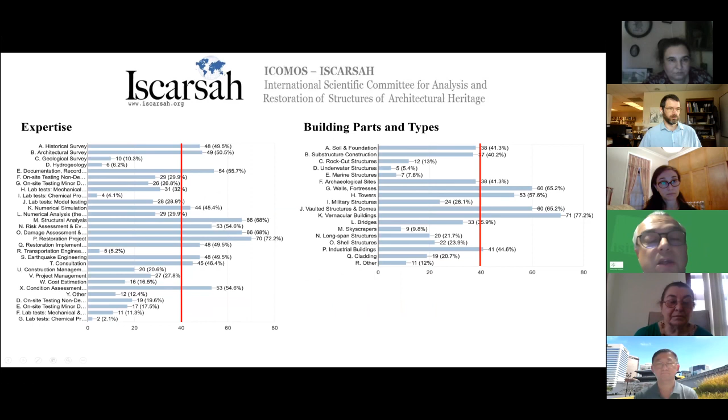This can be sent to you by Tom, the presentation, or I think Tim already sent it to all. Regarding the actions that act on cultural heritage buildings, earthquake is a key concern, the most destructive disaster in terms of loss of buildings and killings, and you can see the expertise is quite high. Also in long-term decay and in foundations and soils, which is a bit unexpected since the qualification in soil and foundation is lower. But this may have to do with the fact that most of our buildings have damage due to foundations.

So I don't know if there is any particular question.

Yes, I'd like to make one small comment about the map I sent, which I made late last night, which essentially shows our representation by geography. Again, I want to say this is preliminary because only 97 people filled out the database. I put the database form again in the chat if people want to fill it out. You do see where we lack geographic representation quite clearly. I think that's an interesting thing to remark. After everyone has filled out the database, maybe we'll have a better idea about our representation.

Right now, if you look at Africa, China, the Philippines, and the area around South America, we are very poorly represented by people who filled out the database thus far, I need to say. That's all.

Okay, so that's all on my side. And I give it back to Goran.

All right, thank you. I can show the map that he's referring to briefly if you would like. Here's the map with our distribution of memberships, which was actually different than I expected. That's not the distribution of membership, is it? That's the distribution of people who've responded to the expert survey. Yes, thank you for the correction.

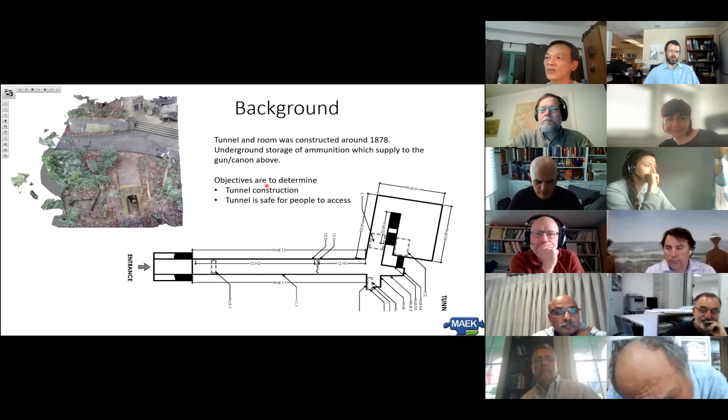The objective was really to determine the construction of the tunnel as well as assess its safety. Unfortunately, there was no drawing at the time because it was so long ago. We started off by, aside from radar, flying an indoor drone to capture the internal condition. We also employed pulse echo tomography to determine the condition of the structure.

There are different types of radar, ranging from a simple, small handheld model to a larger vehicle-operated one, and sometimes we do scans on the underside of the ceiling.

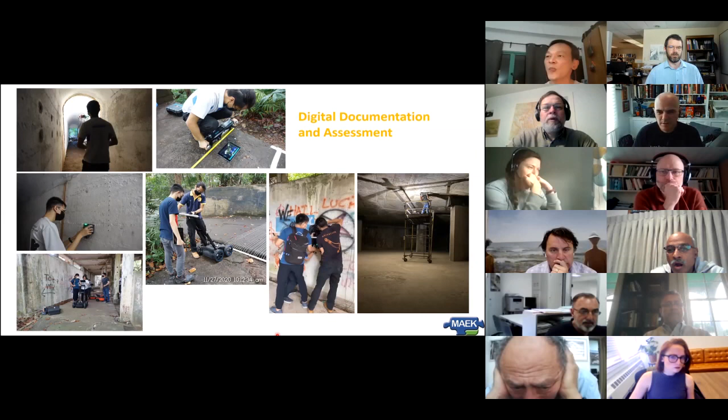We used a combination of radar and LiDAR to scan above the tunnel at the top, and then generated a 3D model. After generating the 3D model, we could find the overburden soil, the depth of soil above the tunnel. So an overall 3D model was generated using the indoor drone as well as the LiDAR.

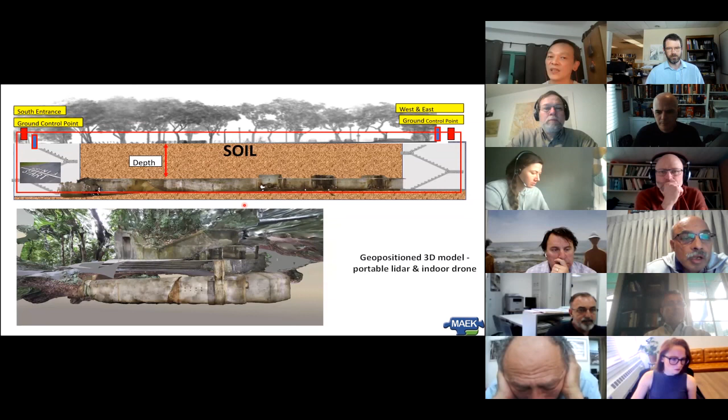Then, using a combination of different radar, we could pick up, for instance, the back wall of the tunnel. Because the tunnel was surrounded by soil, we wanted to know the thickness of the wall. So through the scanning, we could find the thickness of the wall at different locations of the tunnel.

When we ran the radar at the top of the tunnel, we could pick up the arch - this is the arch of the tunnel entrance - and we could find the wall of the tunnel. This was helpful in determining the overall construction of the tunnel itself.

From there, we developed the overall scheme showing different sections of the tunnel with different thicknesses and dimensions. In fact, from here you can see that the concrete tunnel has no reinforcement - it's just mass concrete, about 600 mm thick.

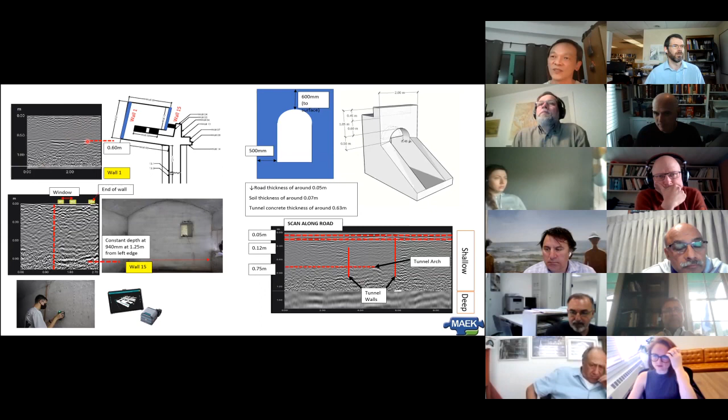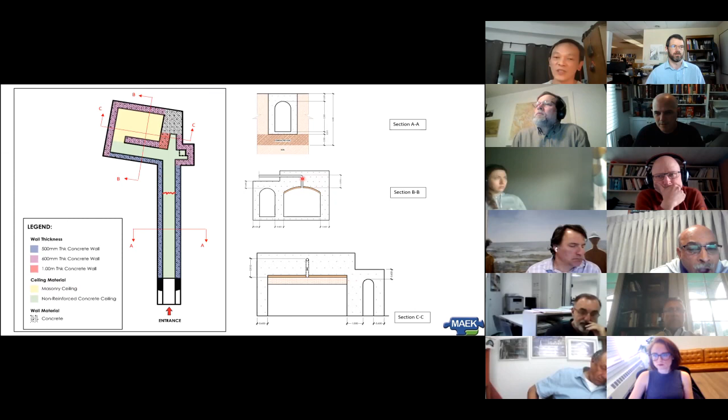There was various thickness in the tunnel. So from here, we have marked out the different dimensions and construction, ranging from 500 mm to 1 meter thick tunnel sections. And on part of the ceiling, we found it to be constructed of masonry - so it's a masonry arch above which you have the concrete ceiling.

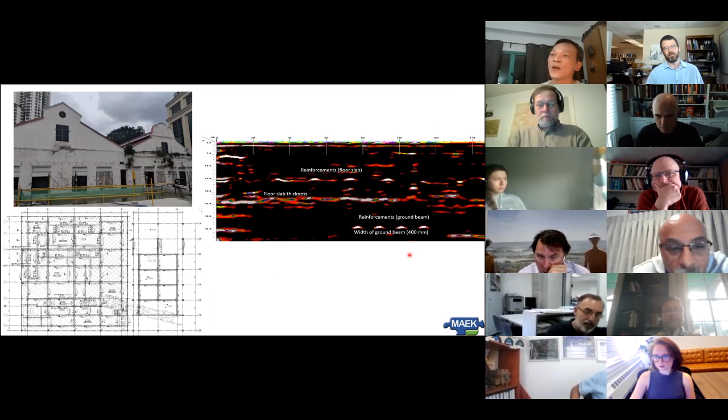In this particular case, this is a warehouse built in the early 1900s. In the recent restoration, the engineers wanted to know the construction of the slab. There was no drawing whatsoever, no indication of where the ground beams are located. Some old drawings were available, but no dimensions were shown. So through the radar, I could find the reinforcement of the slab, the thickness of the slab, and even the reinforcement and dimensions of the ground beam below the slab.

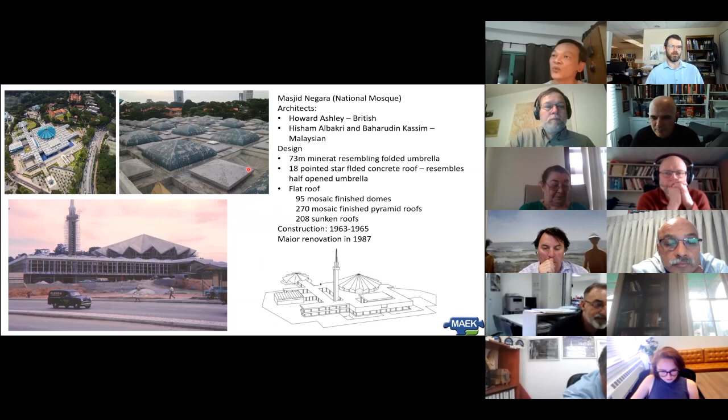And over here, this is a mosque, the National Mosque in Malaysia, built in the 1960s, restored 3 years ago. You can see the roof has a dome roof, pyramid roof, and a sunken roof. The sunken roof is where rainwater discharges from the roof to the ground below. But there was no drawing to show where the rainwater downpipe had been located. When we scanned some of the columns, we detected the rainwater downpipe. A horizontal scan found a parabola. A vertical scan found a line of the rainwater downpipe.

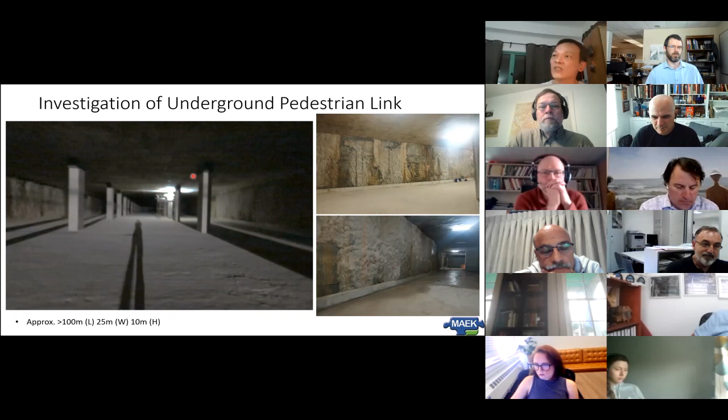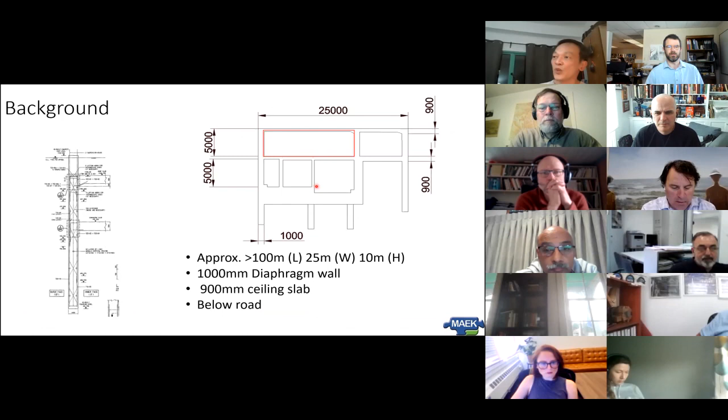A recent project we had is the underground pedestrian link, which has been abandoned for a couple of years. The new owner went in and wanted to redevelop it to make use of the tunnel as a commercial space. In the tunnel there's a lot of water seepage, so the intent is to establish where the water is seeping in. This is the section of the tunnel we were tasked to investigate, below which is the MRT line - it is an MRT station.

Aside from radar, we did the pulse echo tomography. We can do a line scan, picking up the parabola of the steel reinforcement, either in parabola form or after migration of the data, you get dots - these are the positions of the reinforcement. What's interesting is that when we did an areal scan, we could see the reinforcement bars on the right side very sharp and clear, but on the left the image of the reinforcement bars was very blurry. Depending on the software used, you can move the image from top to bottom.

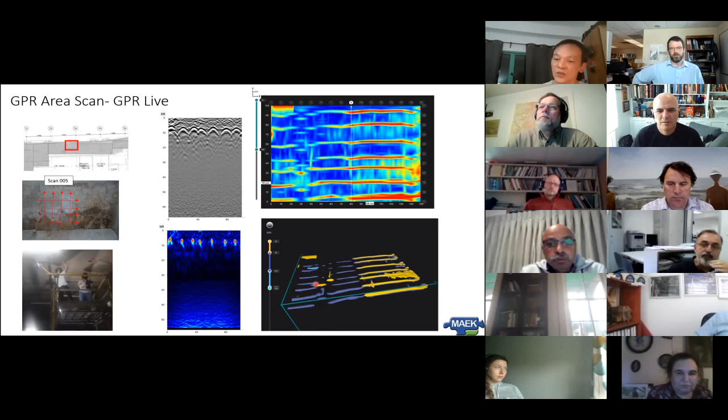On the right side you can see the reinforcement bars very nicely, but when you move towards the left, the bars seem to be much deeper. Why? Because in the presence of moisture, the speed of the electromagnetic wave slows down. Once it slows down, the bars appear to be much deeper from the surface. So we can do it as an areal scan in 2D mode, or use a GPR slice software to generate a 3D mode, determining any subsurface anomalies below the surface.

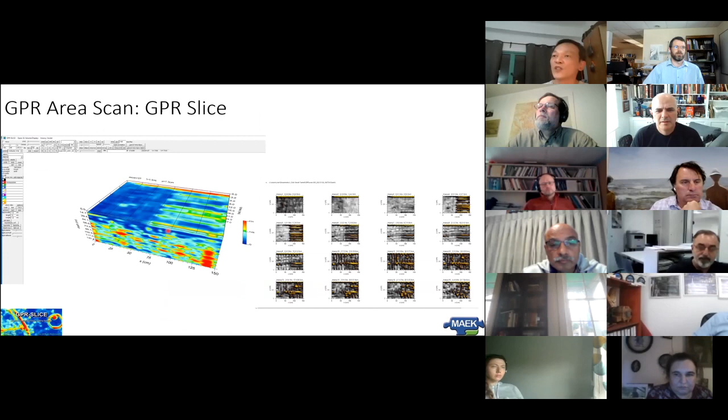Lastly, this is the Church of Nativity in Singapore, built in the late 1800s. You can see over here the columns have been subjected to some rising damp and moisture. We have done a lot of testing around the building's columns to pick up the moisture content below the column, at mid-height, and above.

But we couldn't find the salt content, which required drilling of powder and carrying out chemical analysis. So what we did, interestingly, was to run a radar from the bottom to the top. At a certain height, which appeared to coincide with the area where the salt has caused damage to the plaster, there is an attenuation of signal, meaning the electromagnetic signals have been fully absorbed by the salt. You can see from here, it's about 1.2 to 1.4 meter height.

So we know in this case, aside from rising damp in this old masonry building, we know where the salt tends to accumulate more, at a certain height. And this can be easily picked up from the radar. We found that at the end of the day, radar is very useful in a lot of diagnosis, and we would hopefully like to use more and perhaps share with members of the community the wonderful technique this can bring.

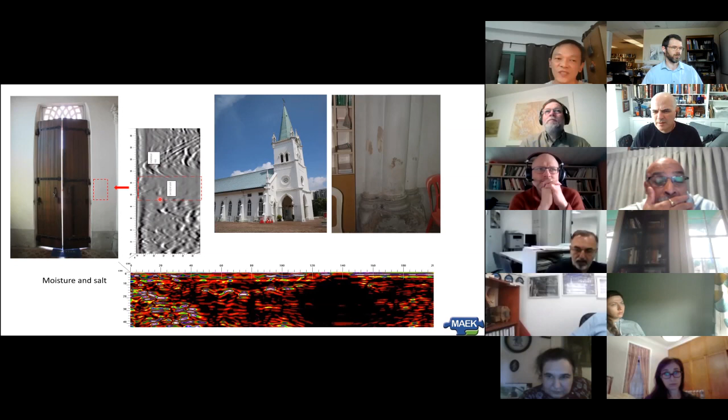And with the improved technology nowadays we have, which allows us to send the signal much further down into the substrate and collect a lot more data, and through some software, you can process it. Okay, with that, I thank you very much.

Thank you. Thank you. It was very interesting.

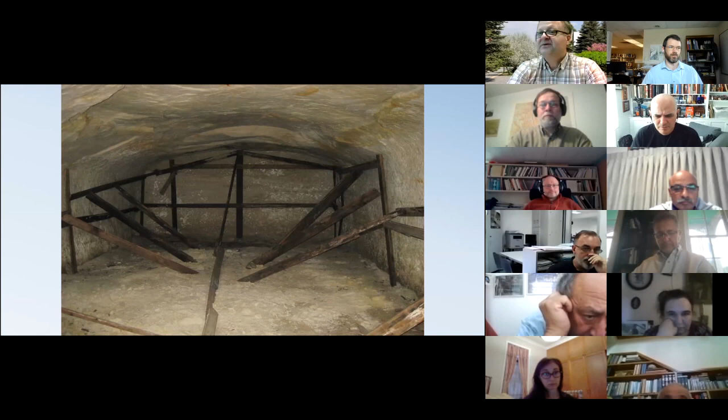but it is surprising to see that glass is a very high strength material. I just would like to highlight that it is about 400 to 800 megapascal strength. So when you compare this with concrete of only 30 megapascal or steel with 320 megapascal, it's like a super material. And the tensile strength is also in the range of, for regular glass, I would say 40 megapascal, and for tempered glass, 120 megapascal.

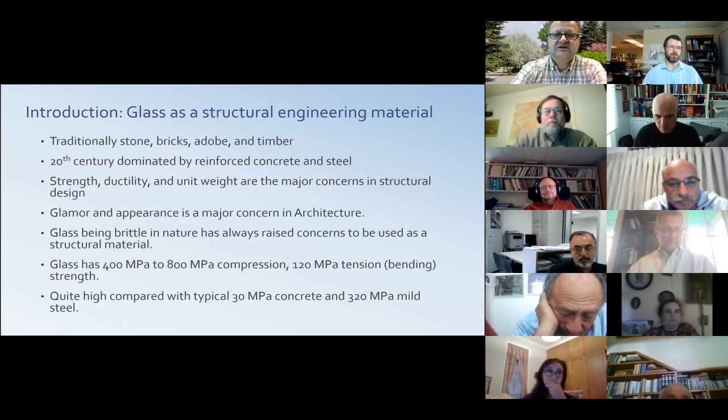So why don't we use it for structural purposes, especially for temporary strengthening or supporting historic structures? Probably because we don't trust it, because, well, it basically cracks and breaks.

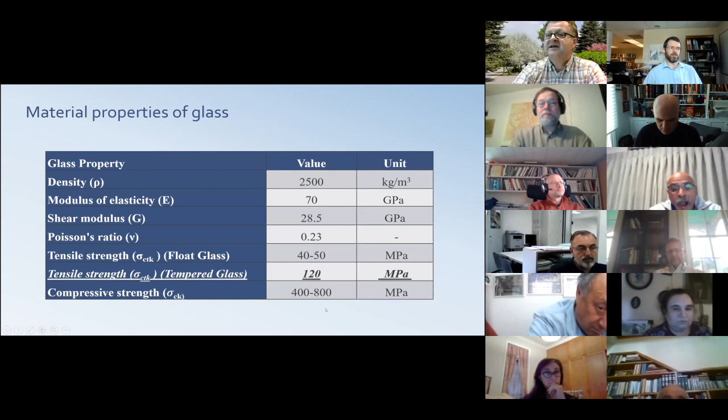So 40 to 50 megapascal of tensile strength for float glass, and about 120 megapascal for tension of the tempered glass, and all the way to almost 1 gigapascal, a very superior strength. With this new glass, there are ways we can prevent cracking. One of them is post-tensioning, and this is what we have investigated in this study.

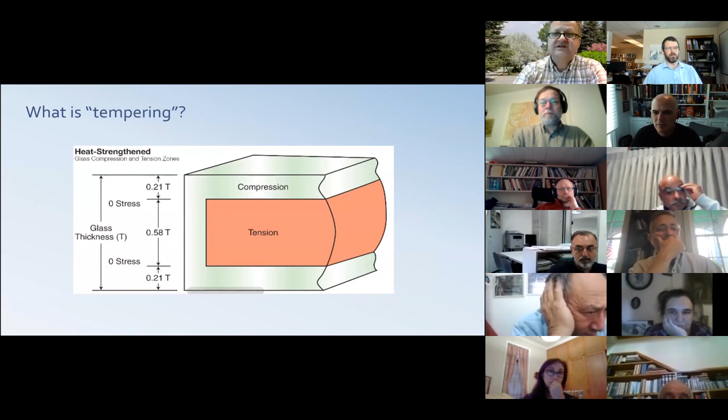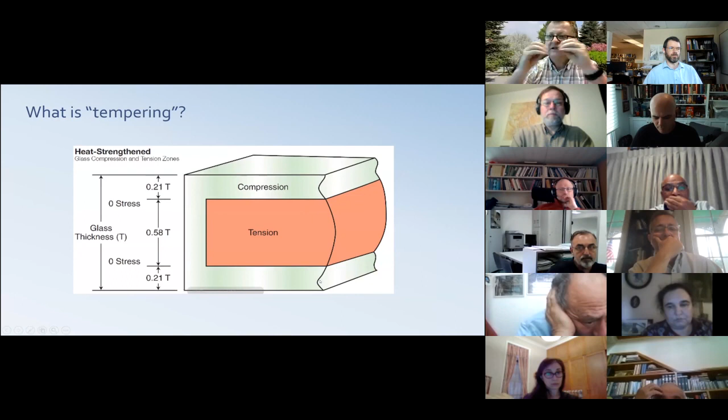Tempering is a strange act on glass that nowadays, for example, car windows are like that. They are higher strength. Actually, it is the ordinary glass, but it just went through some process. So when this is done, the outer layer is under compression and the inner layer is in tension.

So because of that, when it breaks, it just tears up into little pieces, and people use some transparent material on both sides so that when it cracks, it just doesn't shed into pieces.

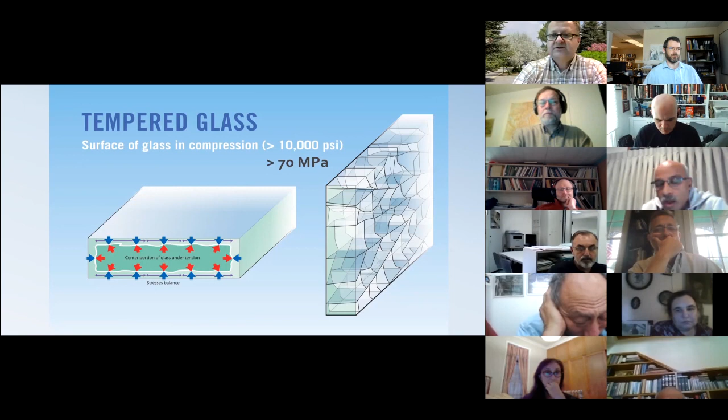So how it is done is you put the glass through some heating chamber, and when it comes out, you immediately cool it off. So the exterior parts are very quickly hardened, and the inner part is still soft. And over time, as the inner part gets stiff, it shrinks and applies a post-tensioning to the outer edge. So this is the production sequence.

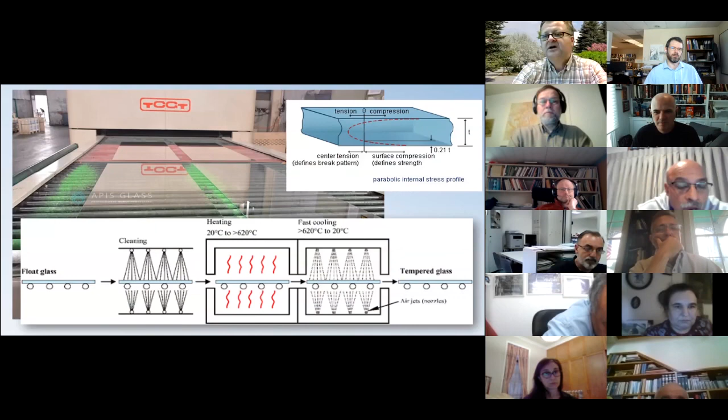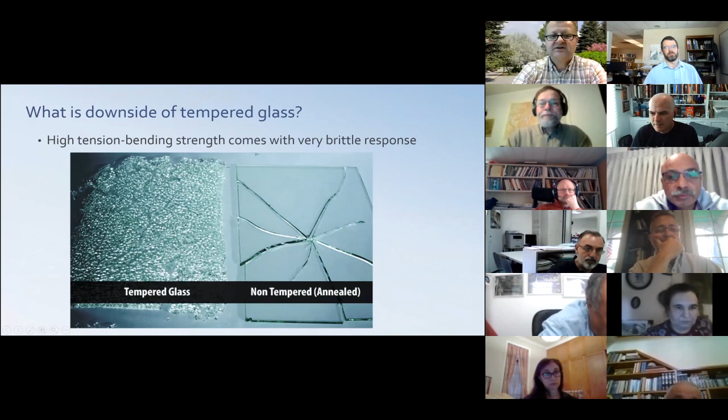So in this study, we have studied regular glass on the right and tempered glass on the left. And I will present you the results that we have obtained, which were quite promising.

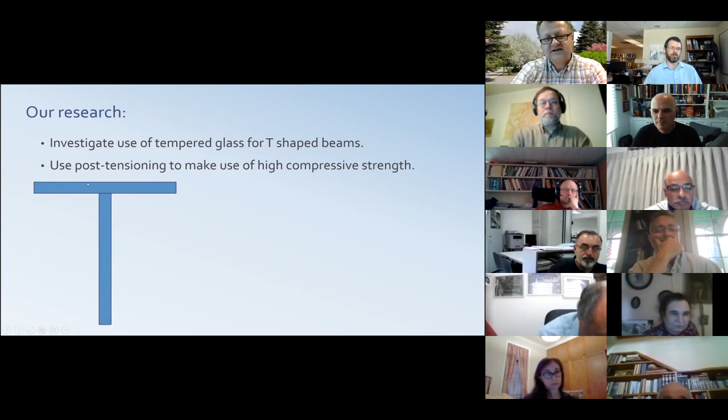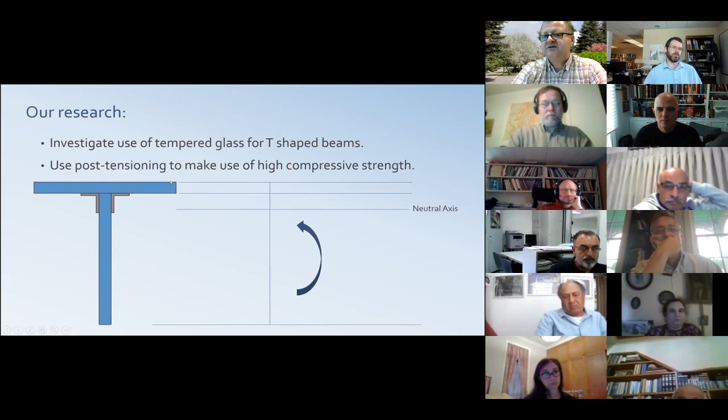So when you have a beam like this, and you apply bending around the neutral axis, you get compression on top and tension at the bottom, which is not very desirable, because remember, the tensile strength is in the order of 50 to 120 megapascal. The compression strength is high.

So there's a trick that we use in reinforced concrete structures, that we apply an axial post-tensioning or pre-tensioning. Since glass is already manufactured, we apply a post-tensioning. And then we just bury this field of compression further into the material and reduce the tensile stresses. So that's the theory behind it.

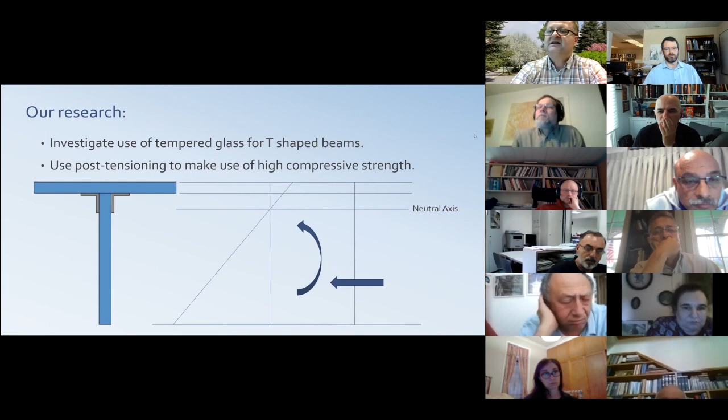If you move this post-tensioning force a little bit below the neutral axis, which is this one here in the middle, then you even produce a negative bending moment, and it will be even stronger.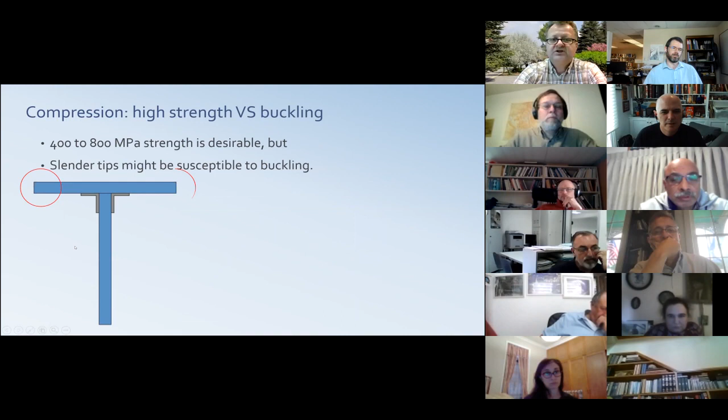A lot of compression though, which might run into some buckling problems. So we need to check the regions that are under high compression, especially the ones at the exterior sides, against buckling. But there are ways to do that.

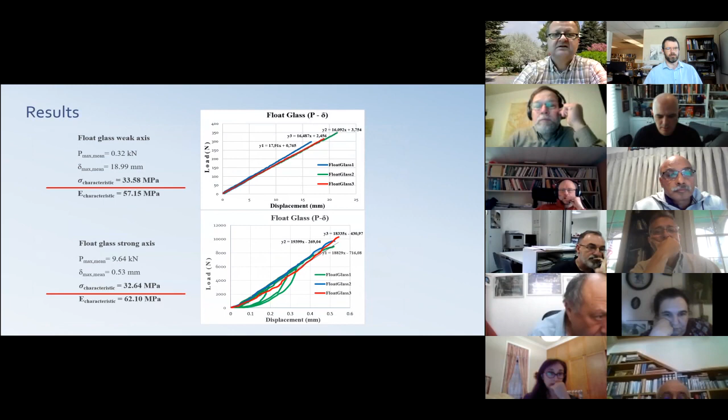So we tested glass in strong axis and weak axis, and applied a simple bending test, and got the results. Regular plain glass had a bending strength of 33, 34 megapascal, which is as strong as concrete. When you use tempered glass, with heat treating, it goes up to 170 megapascal in tension for glass, which is very high.

This is the strong axis when you put the glass like this, and this is the weak axis when you put the glass like this and apply the bending. So they behave differently. After knowing this, we applied this distributed load and the post-tensioning.

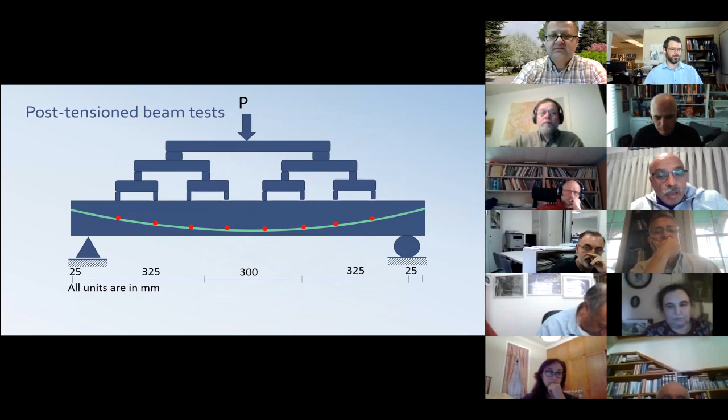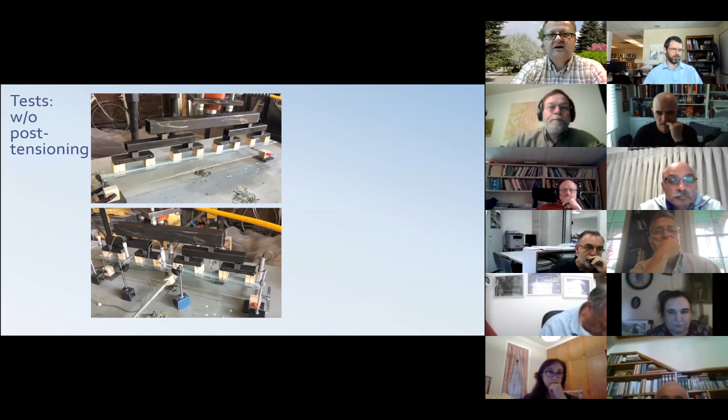So we did this with plain glass and tempered glass, and we got the results. I will just run through the calculations. Basically, we placed some wooden blocks on top of the T-beam, and we tested them with and without post-tensioning to see if we can actually improve the strength.

Now, this is a nice setup that we used to naturally divide the single load into sub-branches. When you apply a load here, it is statically divided into two. So you don't have to apply 8 different pistons, but instead have a simply supported beam, and then each one simply supported. So whatever force we apply, we divided it into 8 equal pieces, which is independent of the deflection. That was a nice setup.

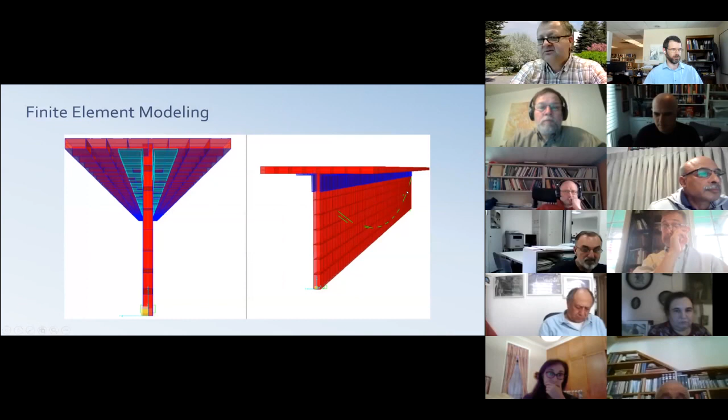And the results that we obtained with the regular glass, it breaks, and with tempered glass, it breaks. Then we applied the post-tensioning, and we did all the additional tests.

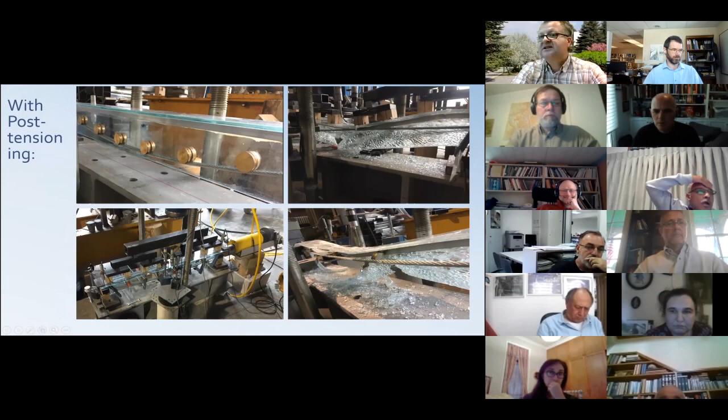The post-tensioning we applied using brass brackets that we epoxied, and we used this nice curved shape, and applied the post-tensioning with a hydraulic piston here, and this is after the test. Now, this is the loading during the testing, and I think I need to come to the conclusion.

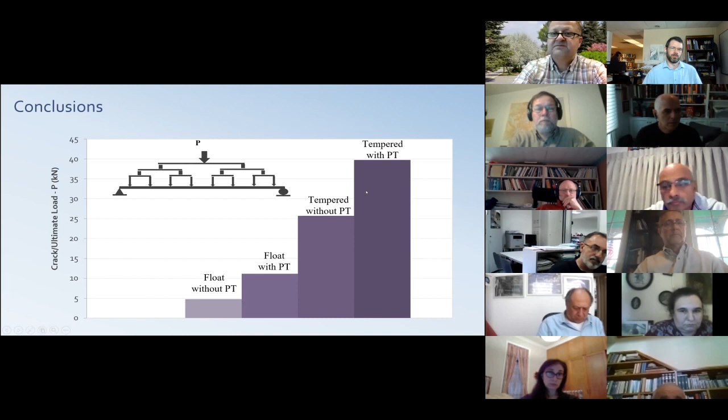This is meaningful because about 30, 40 megapascal versus 120, 160 megapascal, the tensile strength is about 4 times. And when you apply the post-tensioning to the tempered glass beam, we had a superior strength to all the other beams.

The results turned out to be compatible with the hand calculations. So the test, finite element modeling, and the hand calculations yielded the same. So we are pretty sure about the strength.

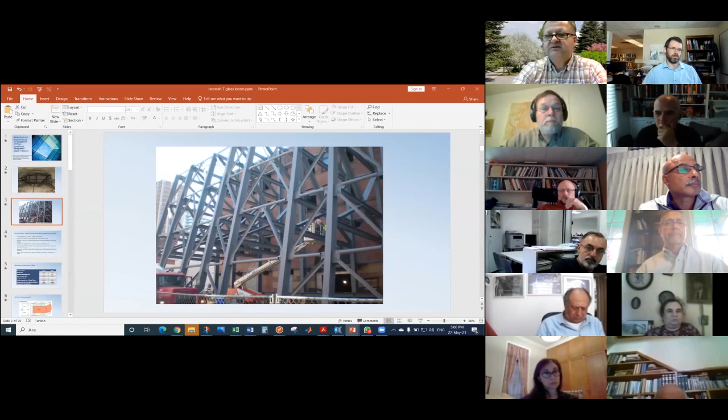And when it comes to basically supporting structures, let me go back to the original, the initial one. I think it may be possible to make these supports under pure compression or bending using glass. And even if that's temporary, it may still have a nicer look.

And for those who think glass is a very brittle material, it is also quite strong as concrete, more than 10, 20 times stronger than concrete. And if you use sturdy cross sections together with post-tensioning, then it can be a nice supporting mechanism for historic structures, together with some timber pieces to minimize stress concentrations. So I just wanted to share these results with you. And if any questions, of course, I would be glad to answer.

Yes, there are some questions. If you look to the chat, you'll see those questions. Would glass be susceptible to long-term creep and deformation under long-term applied loads, is one of the questions. I'm glad to have many questions.